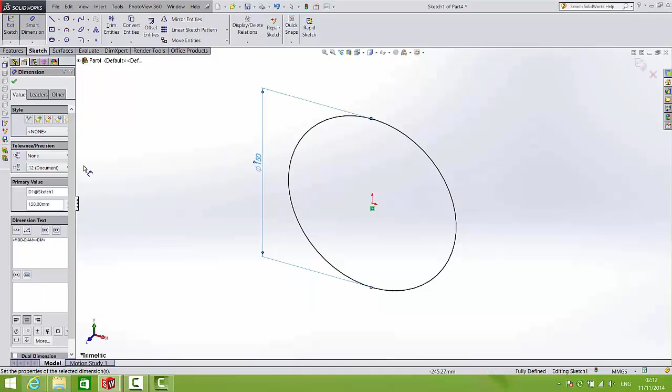So I've opened up a new part and we're going to draw the lid in this part. So to do so, we'll draw a circle. Dimension that circle to be 150 in diameter, and we'll extrude that to a height of 35, but with a taper or a draft of 2 degrees. So this is the blank for our lid.

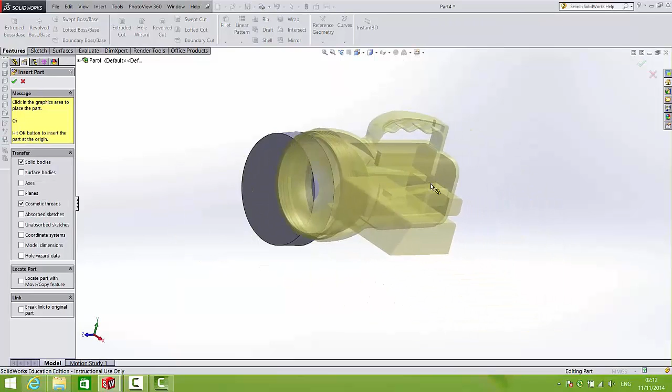We want to use a copy of our existing torch and thread to cut the thread in this lid. So to do that, we'll insert the torch with its thread. So go to Insert, Part, and select the torch that you want to bring in. So if you're very careful, it will snap into position, but you do have to be very lucky for it to snap into position. So I tend to just leave it one side and carefully put it into position.

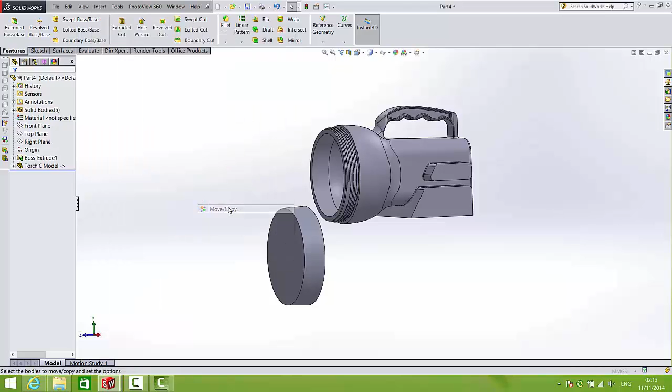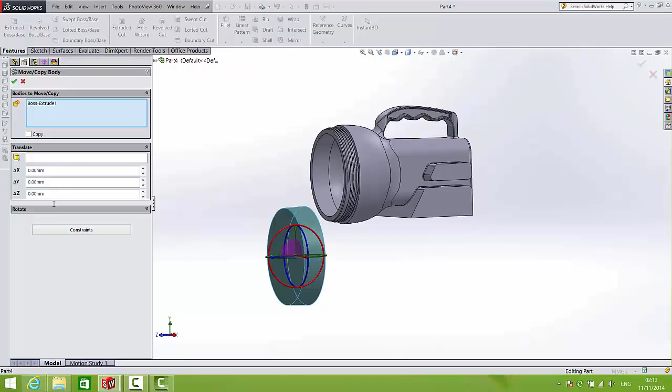You will notice that all the bodies come in, including the 2 bodies that we used a while ago, but that's not going to be a problem. So we essentially have to mate these 2 together, so let's do that. And to do that, we will go Insert, Features, Move Copy. So first of all, the body to move will be the lid, and the mate settings. By clicking this box, it allows us to apply the mate settings. By the way, if you happen to see this menu box, this allows you to move and drag the lid using the XYZ coordinates, but press constraints to go back and apply a traditional mate.

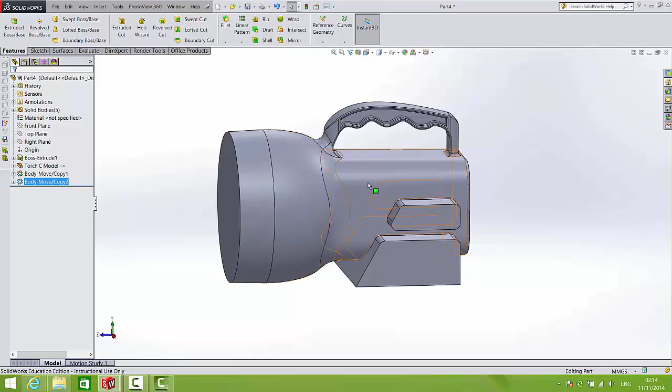So what we can do now is select this face and that face, and they should mate together, which they have done. Now we need to go through the process again. Insert, Features, Move Copy, and now I want to get this body moved, and I will mate the edge of this with the edge of that, and now the torch and the lid have been stuck together. But bear in mind, this is not an assembly, this is the part called the lid, so I want to cut these solids out of it.

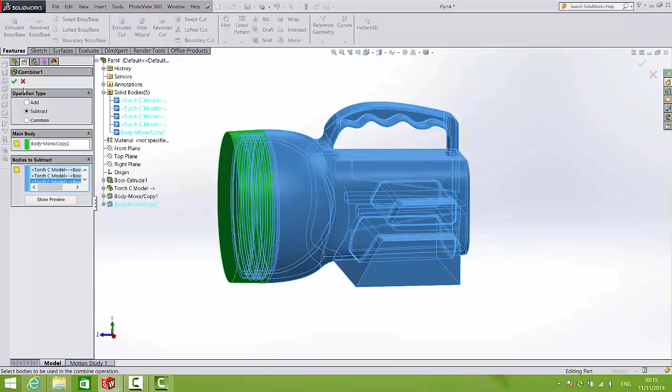So to do so, Insert, Features, Combine. I'll make sure it's on Subtract. The main body is going to be the lid, and the bodies to be subtracted will be the main torch. I can't forget these 2 other bodies as well, and there's the lens inside that I need to remove as well. I can't actually click it here, so from the drop down menu I can select the lens within the body. And now if I approve that, I should have the functioning thread cut from the lid.

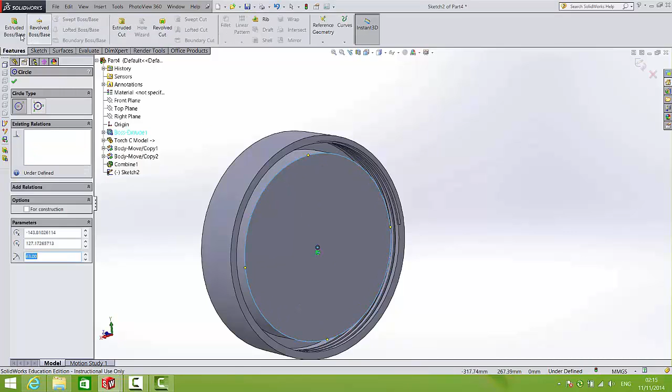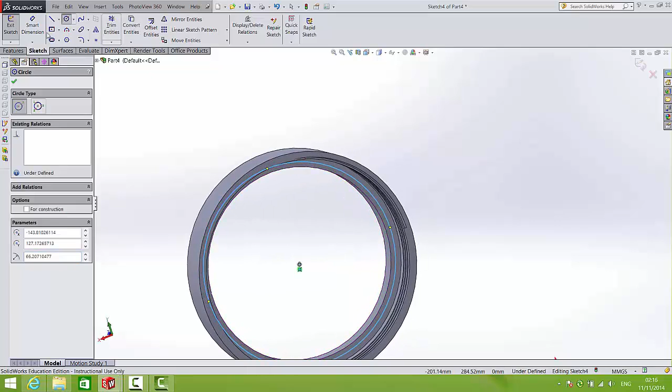So what I'm going to do is create a sketch on this surface of a circle, and I'm going to extrude cut that all the way through. And now while I'm at it, I'm going to make a little recess or a rebate for the piece of glass. So to do that, I will go Sketch, Circle, select this internal plane. That didn't select correctly, so I'll try that again. I'll select the plane first this time, draw a circle on that plane, and let's make it a nice even measurement. Let's make it diameter 130.

In fact, let's make it diameter 140. See how it looks? 140 is a little steep. Let's split the difference. Let's make it diameter 135. And we will extrude cut that to take the piece of glass. And let's say the glass is going to be 3 mil thick. There is a little rebate to take the glass. And while we're at it, let's draw in the piece of glass.

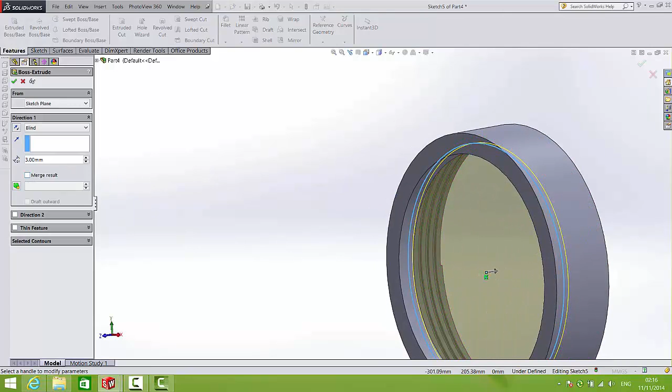So Sketch, Circle, on the same plane. Let's draw the piece of glass there, and this time we will extrude it the same distance, but if we want this to be glass, we will not merge the result, and in a few moments time we can make this body glass. So let's put a chamfer on this line here. So we'll click chamfer and we'll do a distance chamfer, and let's try a 6 and a 3 and see how that works. Not bad at all.

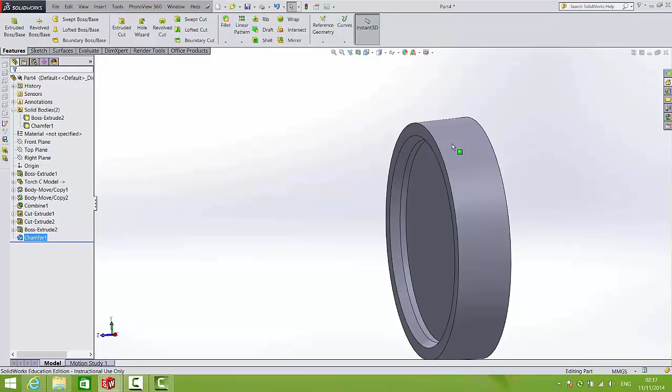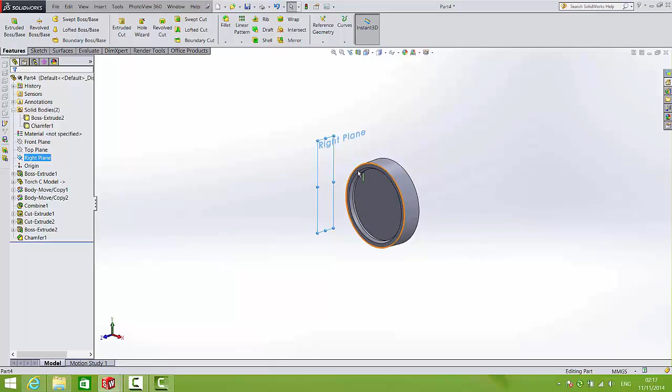And let's just get a little bit of detail up here. So on the front plane, I beg your pardon, it's actually going to be the right plane. Now, no matter, I just notice here that the right plane is shifted. This happens sometimes when you move bodies around, because I moved the lid from the right plane. So I'm going to need a plane through the center of this.

So first of all, I'll insert an axis. And now I'll do reference geometry, plane. I'll use the right plane as one reference and the axis as another reference. And I'll just change the angle to 0. And that should put a plane, and it does, perfectly through the center. I essentially made my right plane again. So on that, I'll create a sketch.

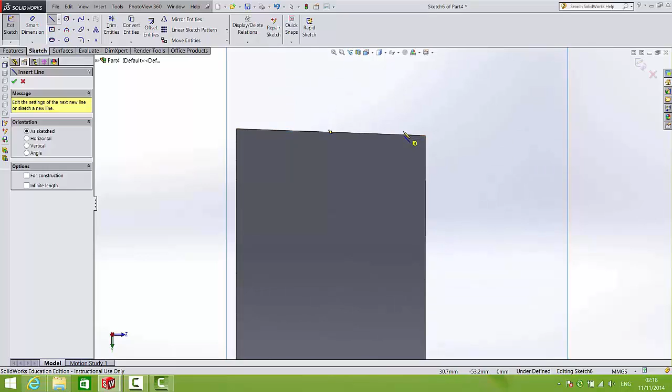It's upside down, but I'll draw it up here. And that sketch is going to look something like this. It's going to maybe start in here, come up at a slight angle, come straight across, and come down. Now, I'm not going to overthink it, and I'm not even going to dimension it in this case.

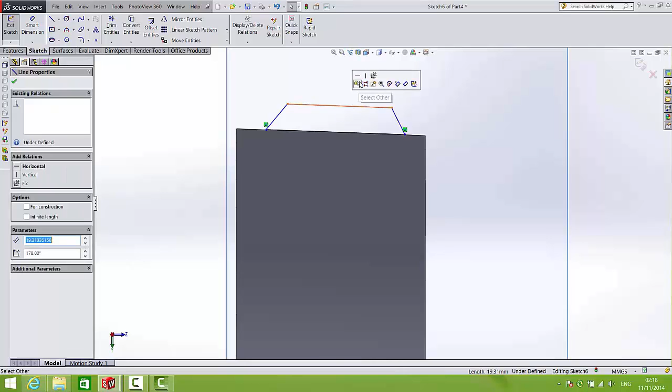I'm just going to make this horizontal. It's already horizontal, so I don't need to do that. In fact, it's not horizontal, it's just inferred a constraint. Those two lines are parallel, so I can delete that and make that horizontal. So there's a little sketch.

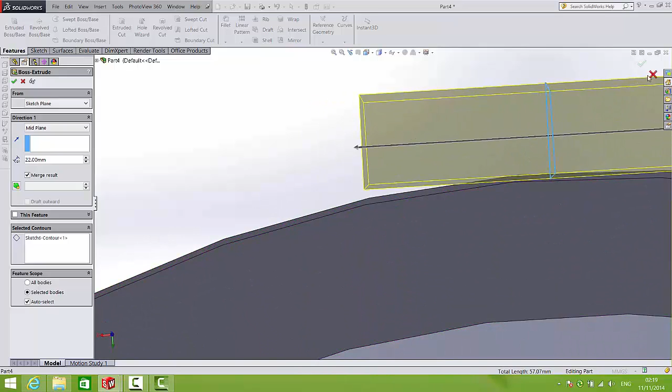I want to make a little grip on the end of the torch. One possible way to do that would be to extrude it, but unfortunately if I extrude it, even mid-plane, you can see it will break contact and leave a little gap there. So rather than extruding it, I'm going to revolve it. I'm not going to revolve it about the bottom, I'm going to revolve it about this axis.

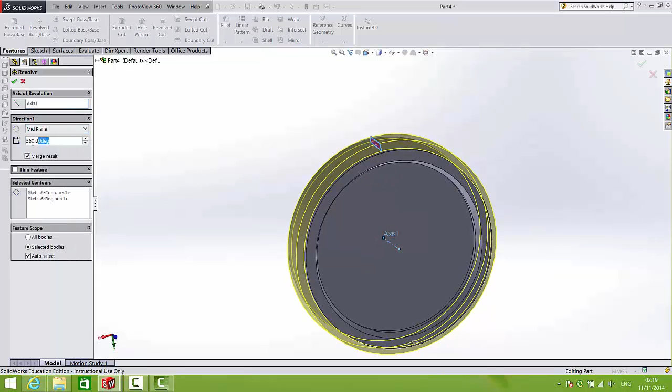Well, first of all, I'll select that profile, and the axis is going to be this axis, and you can see it's doing a full revolution there. I do not want that. I want it to be mid-plane, and let's just say 12 degrees, and that looks okay. So that's a little notch on the top of the torch. Now you could add fillets as you see fit all the way around there, but we'll leave that till later.

So we will now do a circular pattern around this axis, and we'll select this feature, and we'll see how many looks okay. I'm guessing about 8 or 9. In fact, 12 look okay, so let's put in 12 of them. So that is essentially the lid. I mean, there's not much more complexity you can add to it.

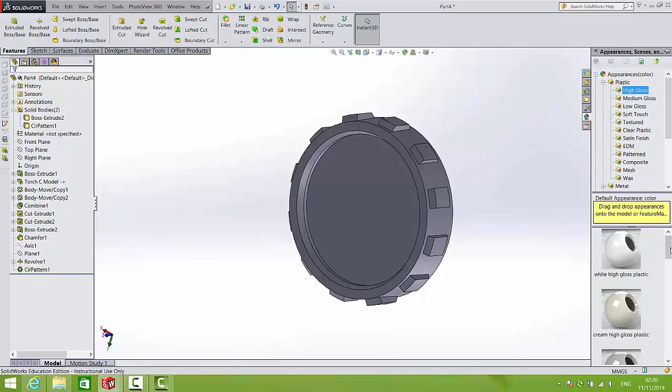While we're here, we'll open up appearances, put on high gloss black plastic and drop it on to that body. We will put on glass or perspex if you want to that body, and there is the lid completed. So we'll save that.

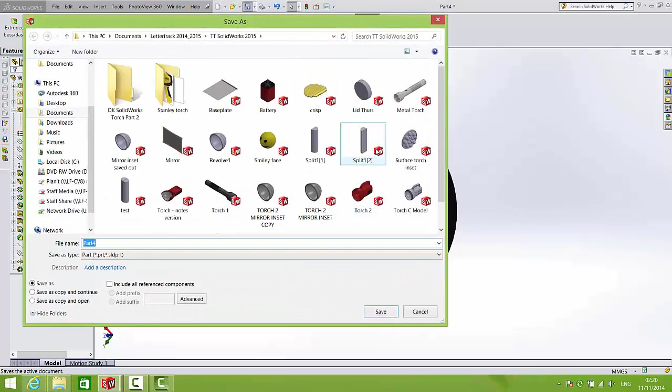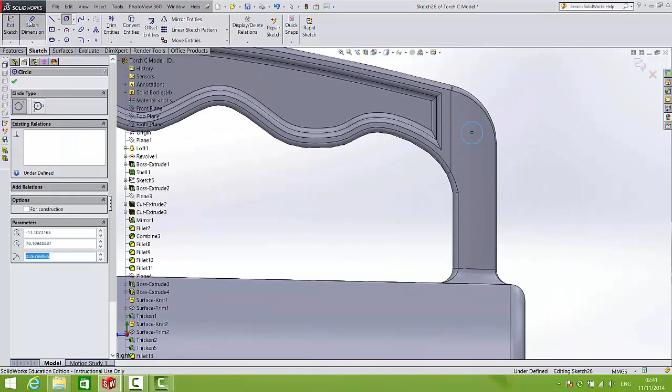So now I'm going to attempt to put an organic looking cord onto the end of the torch. So to begin with, we'll create a little hole on the right plane, and let's say the cord is going to be 4 mm in diameter. So we'll place a 4 mm diameter hole there somewhere convenient, and we'll just apply an extruded cut mid-plane and make sure it just makes its way out.

So our cord is going to fit through that hole, and let's just put a 1 mm fillet on either side. It makes it look just that little bit neater. Okay, so this is obviously going to be a very good start point. So let's put a reference geometry, an axis into that hole, and let's put a plane at a slight angle, let's say 30 degrees. So reference geometry, plane.

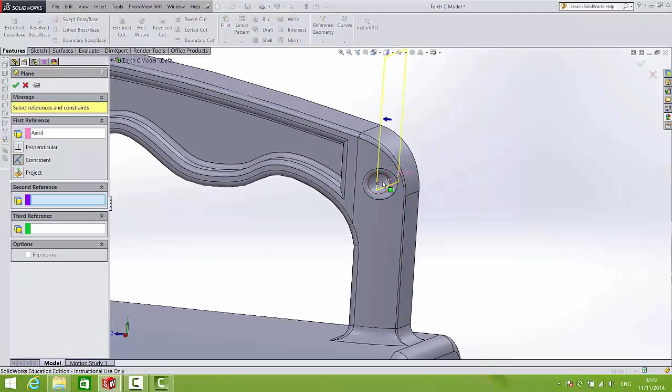I've already selected the axis, and let's select, say, the top plane to be my other reference, and we'll select this angle, and let's try 150 to see how it looks. And it looks pretty good. So 150 puts in a plane at 30 degrees. So the first bit of the cord is going to be draped on this plane.

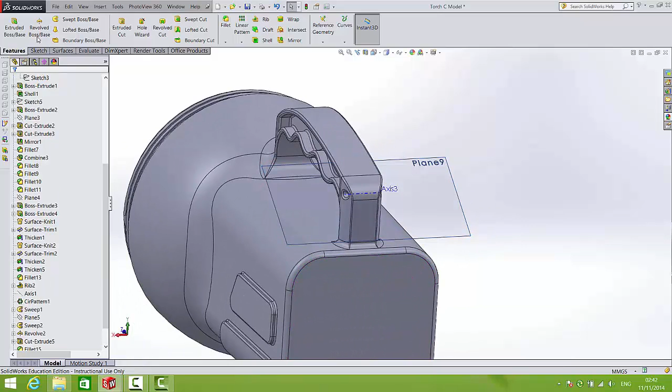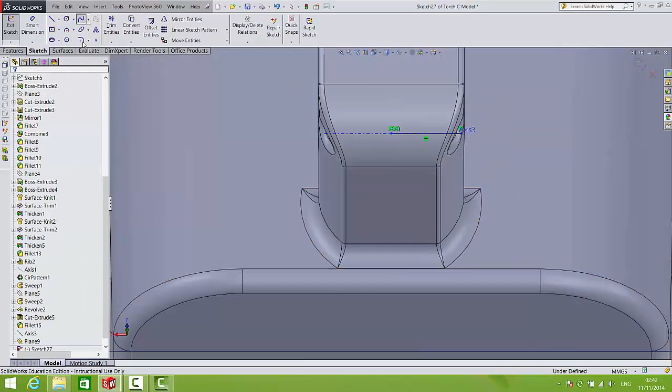So to do that, I'll create a sketch on that plane and I'll look 90 degrees to it. Sometimes that happens, so just look at 90 degrees to it again. And I'm going to do the following. I'm going to draw a line halfway through the hole, just creeping out there. And then I'll switch over to a spline, and I'll try to get the spline coming around in almost like this heart shape.

I'll select that. And I'll put a center line down the middle. Now I'm not wasting time dimensioning this. I should dimension it, but it would really lengthen the videos. So just for instance, to fix the spline, I can just click it and press fix, but I'm not done editing it yet. So I just want to mirror that line and that spline about that line.

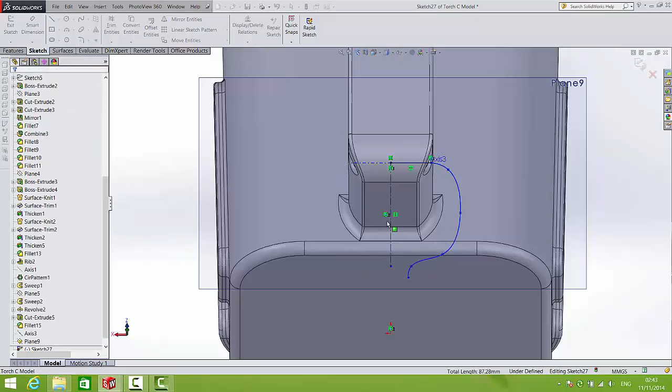And in fact, I'll tweak it before I mirror it. What I want to do is make sure by holding control that this line and this curve are tangent, so that will get a nice smooth transition for my spline. And also down at the very bottom here, I'm going to click the spline, and I should get this little diamond which will allow me to set the angle.

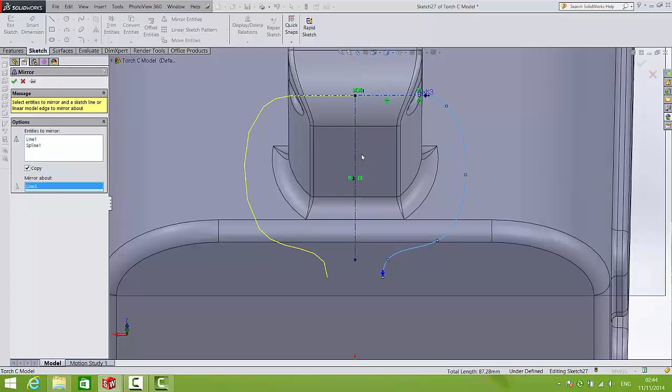In this case, it's going to be 90 or minus 90, to make sure it's vertical. So now I can do my mirror. I can mirror this little bit of a line and that spline about this center line that I added, and press OK on that. So that's going to be the path for the bit of the cord, and you can edit it as you see fit, but I'm hoping that will look okay.

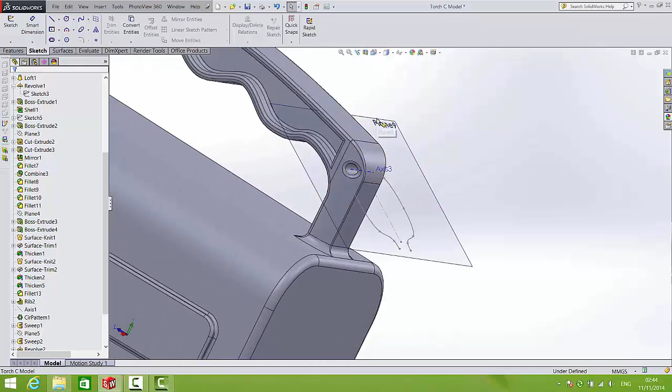So let's approve that. So to draw a circle, I'm going to hide this plane. In fact, I won't for a moment. To draw a circle, I need a plane at 90 degrees to this new plane I've created. So in fact, I'm going to open up that sketch again and just put a center line between there and there, which will give me an axis of revolution for my new plane.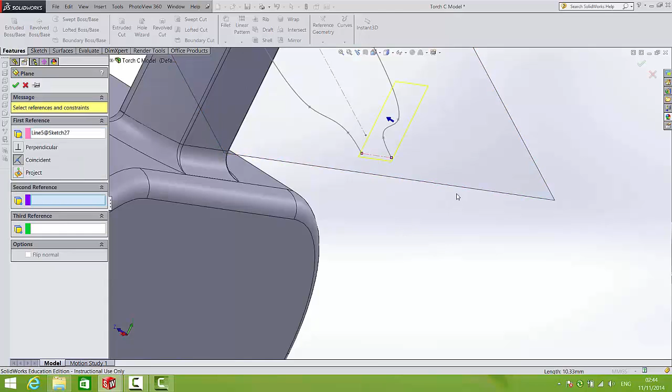So features, reference geometry, plane, select that newly created center line and select this plane, and make sure they go on at 90 degrees. So let's just put on an angle of 90 degrees. Sorry, I messed up there. I'll try that again. Reference geometry, plane, axis, plane, and 90. There we go. So just for clarity, I'm going to hide this other plane, and on this plane, just so we don't make the mistake, I'm going to draw a circle, center it there, and we'll dimension that to be diameter 4.

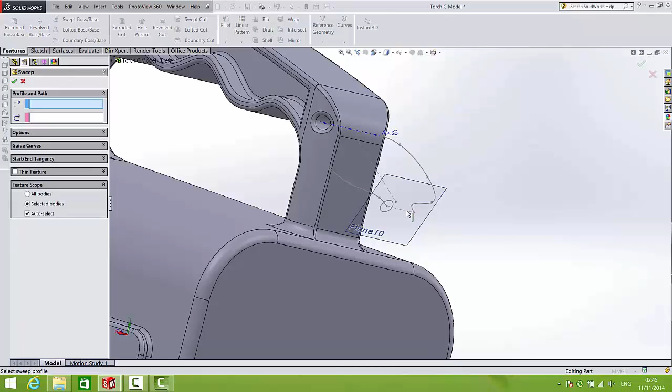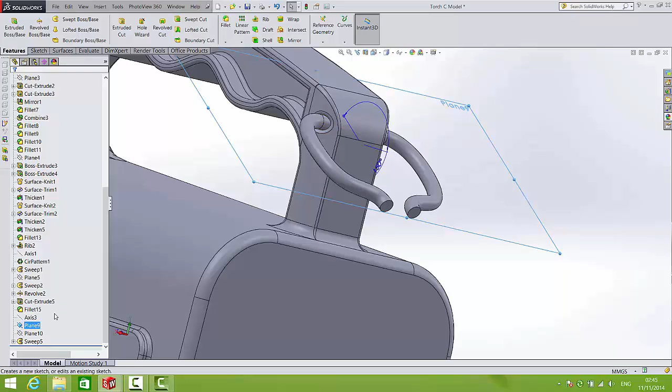So we can sweep that. So let's go features, swept boss base, there's the profile, there's the path, and let's just go into options and don't merge the result. Right, so that's the first bit. Let's just tidy up the sketch a bit. So we'll hide the axis and we'll hide that plane. And now, in fact, I'll bring plane 9 back into visibility. If I can do it there. I can't do it there.

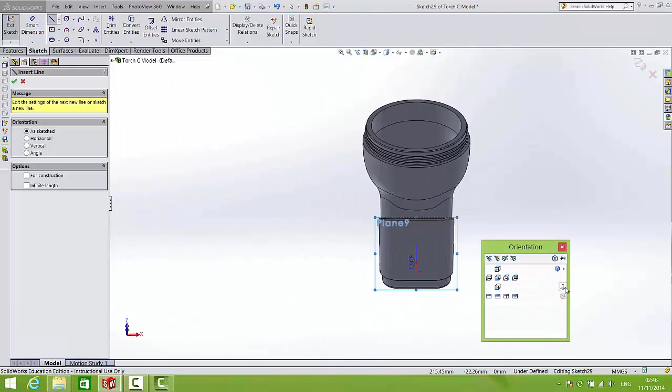There we go. So on this plane, I'm going to continue that little cord. So let's make a little connector here. And what I mean by that is this. On plane 9, I'm going to zoom in. And I'm going to start at the center and go up a little bit, come across, and just make, again, almost like a little heart shape. And I'll join those with a center line just because I want to mirror them. You can mess around with dimensions yourself. Now I'll mirror those few entities about this line.

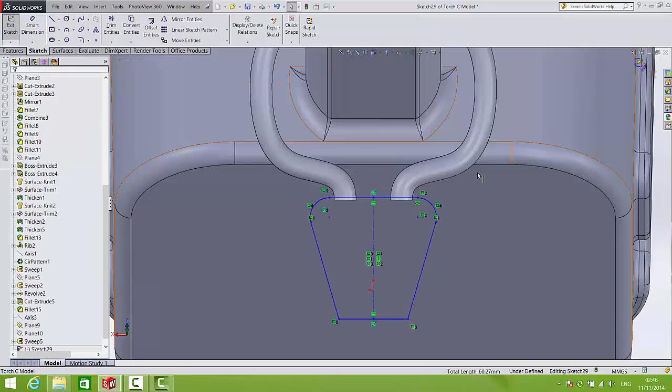Press OK. And I will do a mid-plane extrusion. So features, extruded boss base, mid-plane, and let's bring that to a thickness of 6. So now we almost have a little drawcord there. And I suppose I probably should have not merged that result. So let's not merge that result.

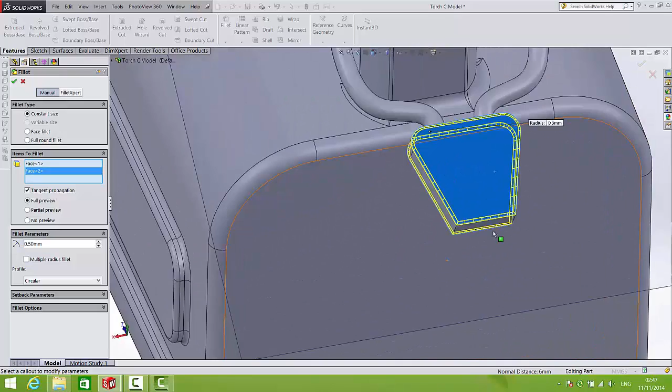And we can just put a tiny fillet on that. Let's see how a 1mm fillet looks. It's a little strong. Let's change it to 0.5. And let's change the back to 0.5 as well. And we'll just take this corner and that corner off it as well. And now we're getting there. So I'm going to hide this plane.

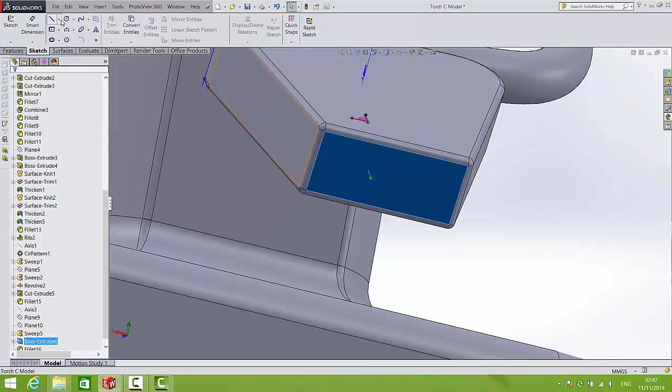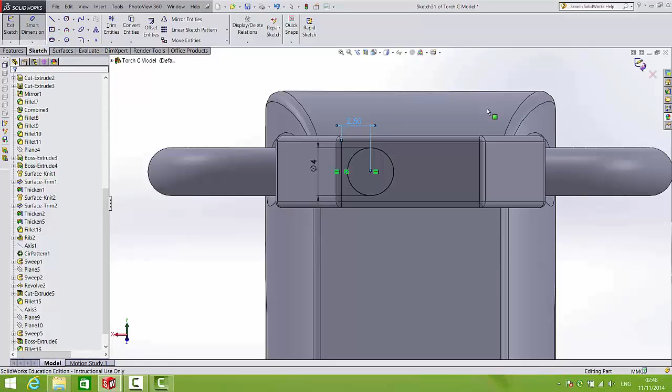But on this tail end, I'm going to put two circles where I want the, in fact, I'll select the plane first. I'm going to put two circles where I want the cords to enter and exit. So I'm just going to have to be careful and put one circle here. We'll dimension it to be 4. And we just have to be careful to tell this point and that point to be horizontal. And let's just smart dimension that from the edge at 2.5.

Now I'm going to close that sketch because I want that sketch to be my profile when I sweep it in a minute. And I'm going to create a second sketch on the same surface, the same size and the same offset. That was 2.5 actually. There we go.

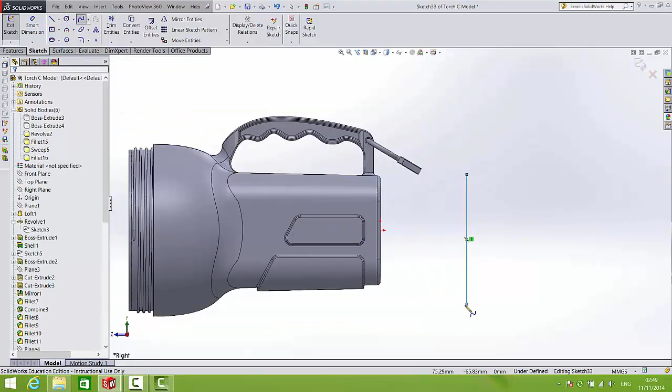So now, to get a 3D spline, what I'm going to do is this. On the right plane, I'm going to create a center line for my axis of revolution. And from that, I'm going to make a spline. Now you can experiment around with this spline and you'll get varied results. But if I revolve that around, there is a separate body, a separate solid along which I can drape my cord.

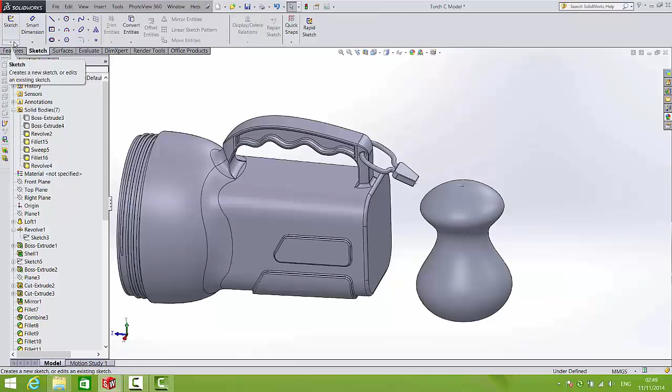So I'm going to go to Sketch, select a 3D sketch this time, and a spline on surface. I'm not going to attempt to start it here. I'm going to just start it up here. And make your way around. It will drape that cord over that surface for you.

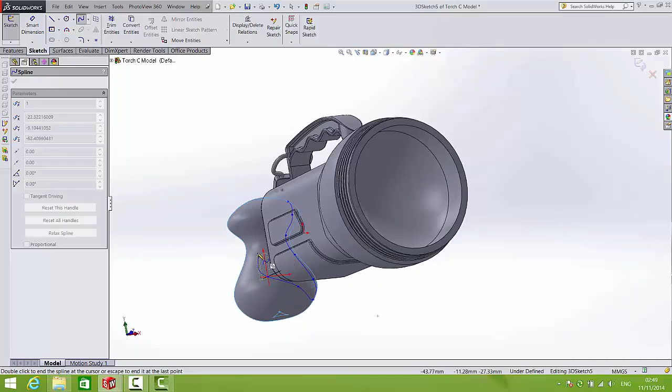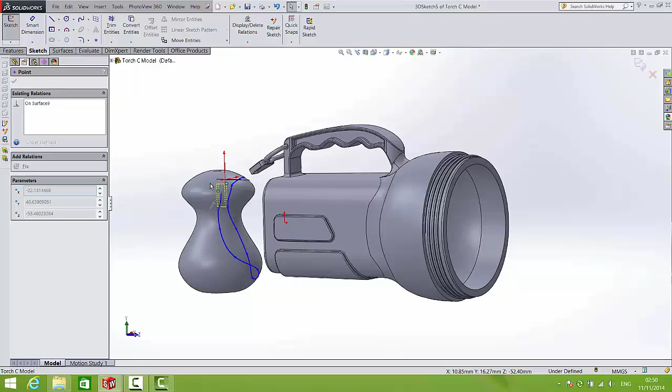We'll select that. Now we can drag the points around to make sure we're happy with them. I'll undo that. I dragged the wrong point around, so we'll drag the point up like that. And it's quite demanding on the computer, so my computer is freezing there. So we'll just try that one more time. Okay, I'll drag that around to the top.

Okay, it's not ideal, so I'm just going to do a bit of massaging on that. In fact, I'm just going to delete that and pop them in again. Be good practice. So spline on surface, and we'll try again. Pick a point there.

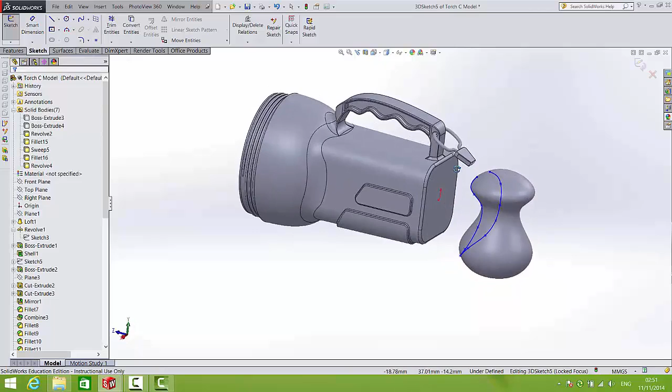And that looks much better this time. Now, to finish off the spline from there to there, I'm not going to use a spline on surface. I'm still in a 3D sketch, so I'm going to call up a regular spline. And from the center of that circle to the spline there will be one spline. And I can click and drag that.

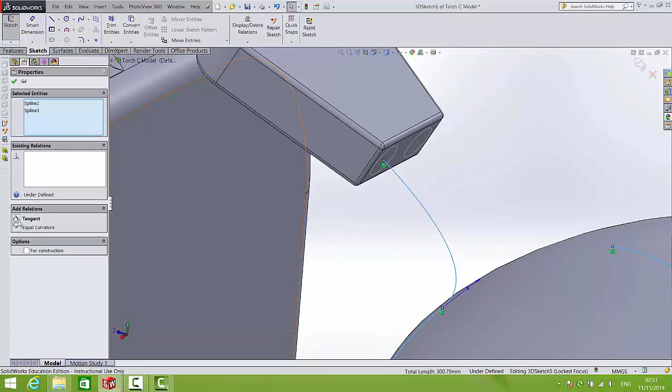And I can set this line and that line to be a tangent. And finally, I can add one more spline from the center of this circle to the end of that spline. And let's just rotate that around a little first and hold Control and select this spline and that spline and tell those to be a tangent.

Now that's why I needed the two circles there. The first circle is going to be my profile, the second circle, or a point indeed, just helped me finish this sweep where I needed it to be. So let's hide that body, and now if we do a features and a swept boss base, we can sweep that circle along that path, and we will not merge the result.

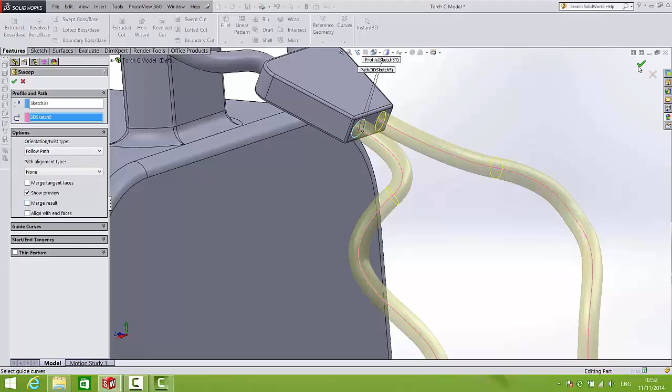And now we have not a bad looking cord at all. And of course, if you go in and edit them and spend a bit more time getting these splines a little bit better, you'll get a much more natural and organic.

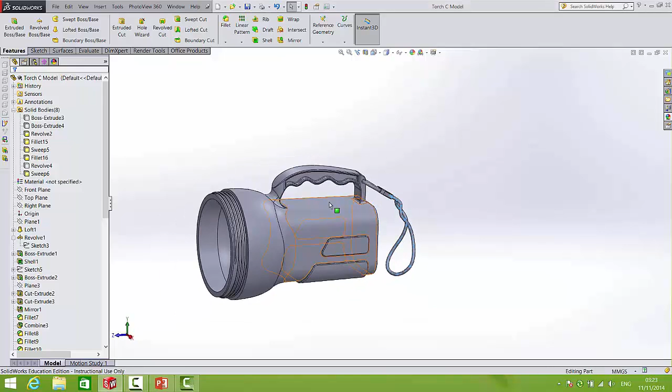So in this final video for now, I am going to do a few bits and pieces. First of all, I'll split the torch, and let's just bring in the battery. Now I have a battery drawn already. It's not too difficult to draw, so I'll just go to Insert, Part, and I'll select Battery. So I'm going to let the battery come in anywhere.

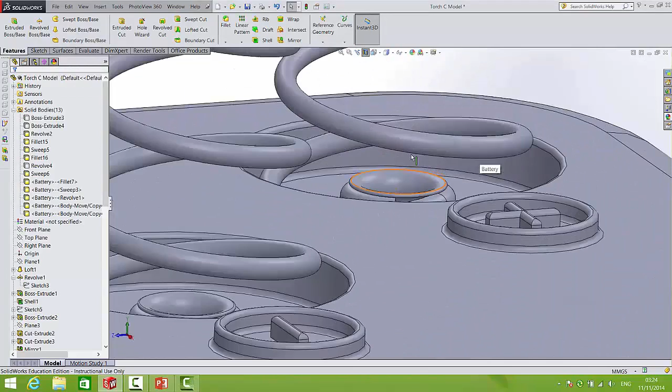The battery is drawn of a few different bodies. I've got the springs, the rivets, and then the battery itself. So it's pretty square, pretty blocky. The hardest part are the spirals, and they're just sweeps. So to put that into position, I want to go Insert, Features, Move Copy. But I want to move all four bodies. So the rivets, the springs, the rivets, and the springs.

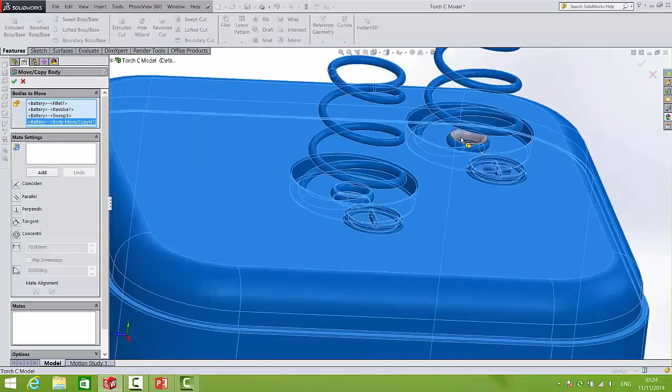And the mate settings will be, I want it to mate with the bottom of the torch, but I want a distance mate of 10 mil to kick in. So the torch goes over there, or the battery goes over there. Now I need to do another one. Insert, Features, Move Copy. Again, I'll select the battery, the spring, the rivet, and the mate will be between this side surface and that plane.

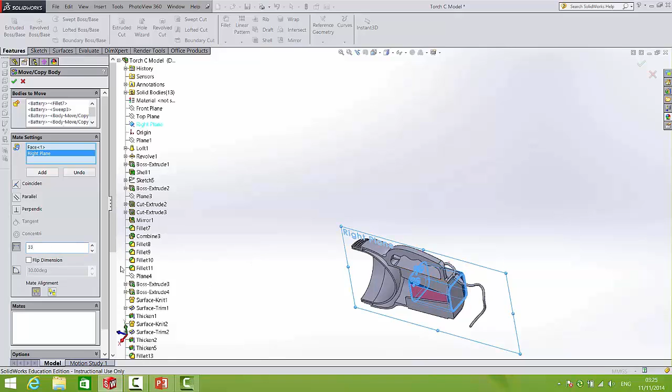Now I know that the battery is 66 wide, so I will put a distance mate of 33, and if needs be I will flip the dimension. Just give it a moment to think about it, and now the battery is perfectly centered in that direction.

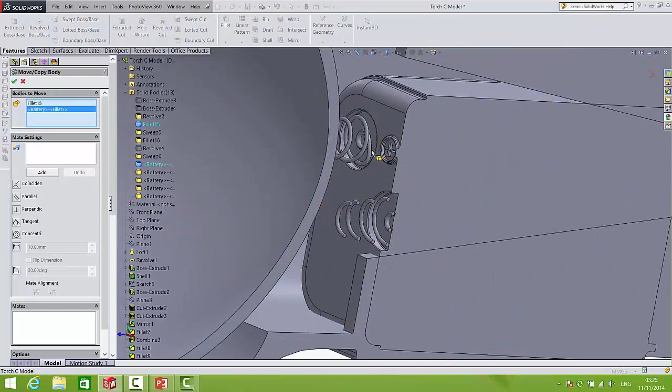And finally, Insert, Features, Move Copy, select the battery, the rivet, and the spring. And we're going to mate, this time, the top surface of the battery and the top plane, and again we'll put a 33 mil offset. Hopefully the battery will be centered in the torch now.

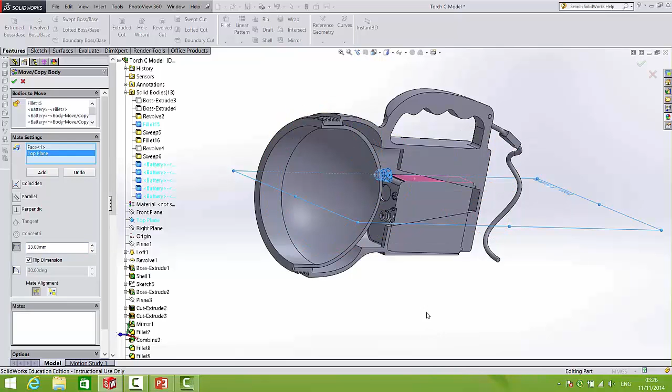Just for some reason it didn't pick up everything here, so I'm going to start that again. Let's see what happened there. We'll go to Insert, Features, Move Copy. I don't think I was careful enough the last time when picking the bodies. No, that should be that. And the mate settings will be the top surface and the top plane, a distance of 33, and flip the dimension.

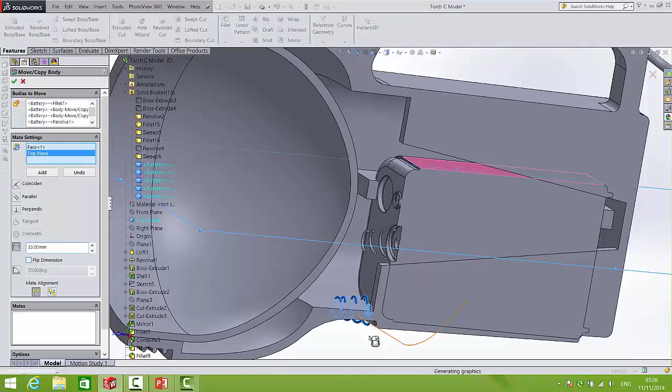And for some reason it just brought the spring, so let's approve it. Okay, it just didn't preview, so it did actually bring the entire battery. So the battery is located in the center, which is very useful if you want to put a bit of circuitry between here and there.

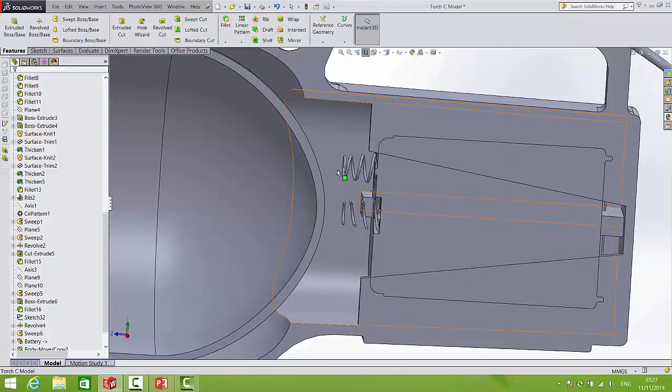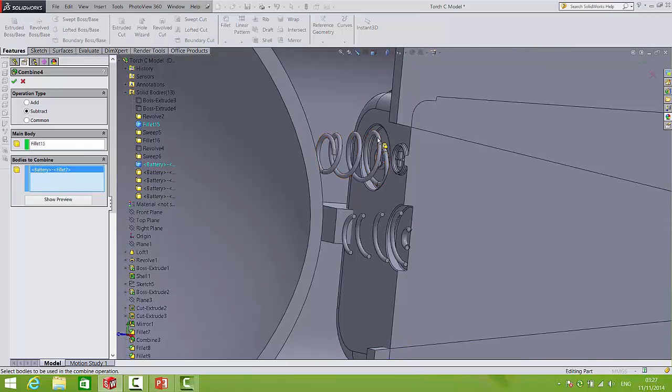Now in order to cut that shape out, I'm going to go Insert, Features, Combine, do a subtract, and the main body will be the torch, and the bodies to combine will be the battery, the springs, and the two little rivets. They all need to go.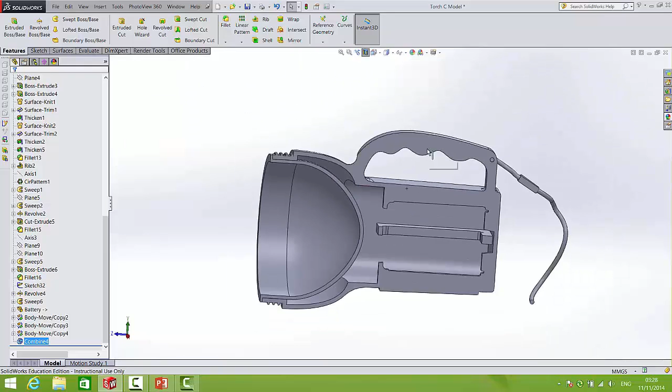And if we press OK on that, take a moment, the exact shape of the battery is cut out. Now we may need to trim up this little piece later to make sure the battery can actually slot in, but I'm going to move on for now.

So before I add a decal, let's just quickly add some color. So I'm going to put high gloss red plastic onto the body. I'm going to put, let's say, a low gloss dark grey or a black plastic onto this thicken. I also need to put that onto the fillet feature. I need to put it onto this thicken.

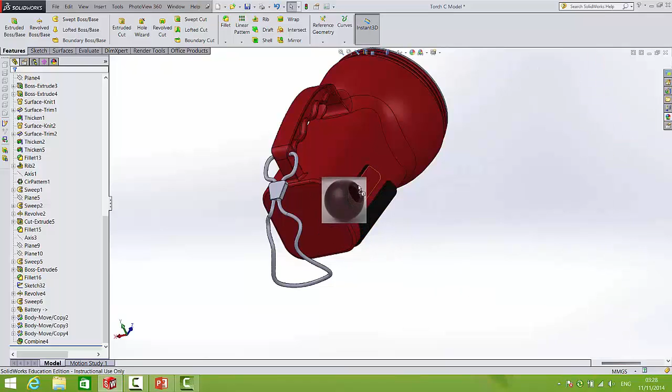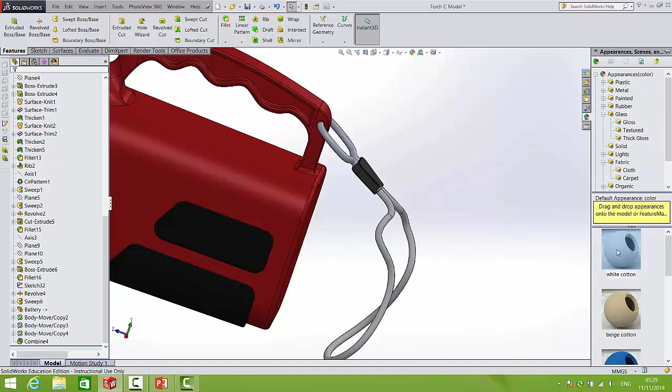A slight mistake there, I put grey on as opposed to black, so I'll pop that back over it. I also need to put black on there, and I'll put black onto this little body there and onto its fillets. And just for the cord, I'll go down and find fabric. You can experiment yourself, but there's a cloth fabric that looks okay in the render, and we'll put the cloth fabric on there.

And finally, just for the lens, we can put on gloss, and we can put on mirror. See how you get on with mirror. If mirror doesn't look well, polished titanium usually looks pretty good. So finally, to put on a decal, we can first of all just go to PowerPoint, which is a very good place to edit decals.

Both these decals look good. This GMIT decal, if I right click and format the background of the PowerPoint slide, I can see that it actually has a white background. So to clip out the white background, double click it, go to color, set transparent color, and then click any of the white area. So to save this, right click, save as picture, and just call it logo. And I'll save it to my desktop and to this file so I can get it.

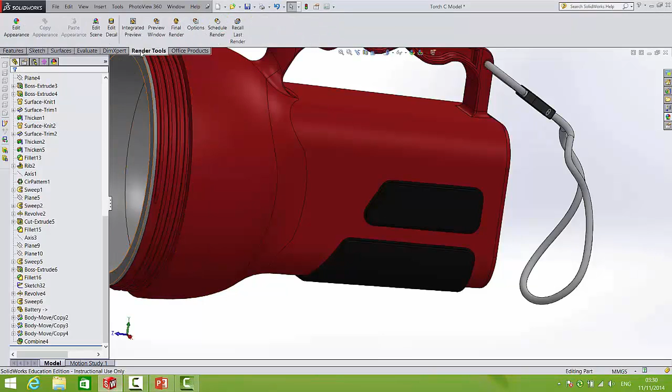So it's called logo. Now interestingly enough, this is just a text box within one of the Office programs. You can right click and save as picture, and I'm going to call this text box image. I'll save that to the same location. And that allows me to write and change any font and make that into a decal. So the use of that is as follows: render tools, edit decal, browse, and I'll go to where I saved it. So it's in here.

So the My Torch decal will allow me, if I click this surface, to simulate. Now, by the way, the logo will come in with this black background, unless you select Use Decal Image Alpha Channel. And now you can see that's a good way to simulate putting your own handwriting or putting text onto a torch. So I leave that there.

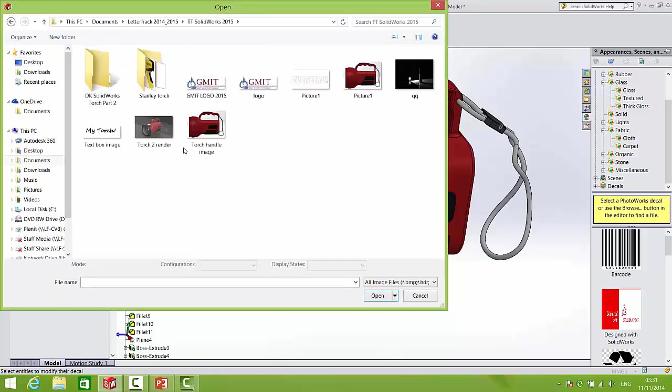And if I want to put the logo on here, edit decal, browse, go to that folder and hit logo. And then click the surface you want to put the logo onto. Now this logo comes in with a white background, which leads me to believe I selected the incorrect one. So I'll go edit decal, browse, go back to my folder, and yes, I mustn't have saved it correctly. So I'll just quickly go back in there and save that correctly.

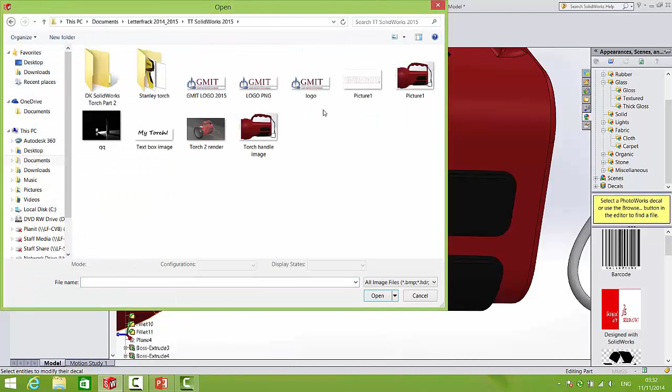Right click, save as picture, and of course I need to change this to a PNG file rather than a JPEG. So I'll call this logo PNG, and now we'll try again. So browse and find my file, and logo PNG, click the surface. Now it comes in with a black background, so we'll hit Use Decal Image again, and we can now rotate that, and we can move it a little. Let's rotate it, make it a bit bigger, and now that will come out quite nice in the rendering.

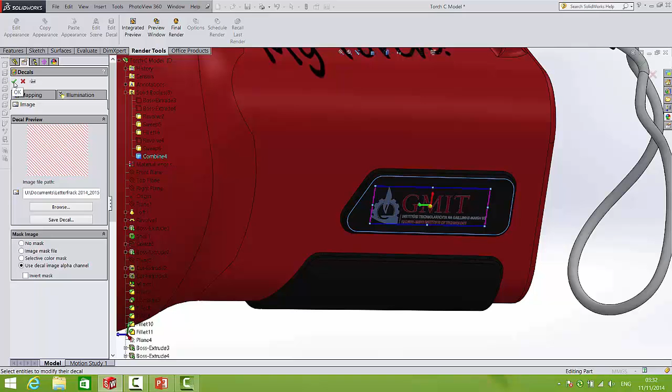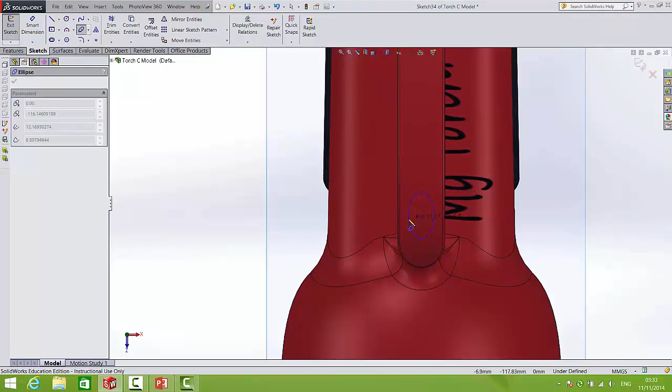So the last thing I'm going to do on this torch is just put in a little button. So I should really have done this earlier, but it escaped me. So let's just put that plane up there, and we'll create a sketch on that plane, and the sketch is going to be an ellipse, and we will extrude cut that down.

Rather than cutting it down all the way, let's offset it from surface just by 1.5 mils, and we'll select this surface, and I just need to flip the side to cut because it's cutting above the surface, so reverse offset. Now it will cut down into the surface, and there you have the little notch.

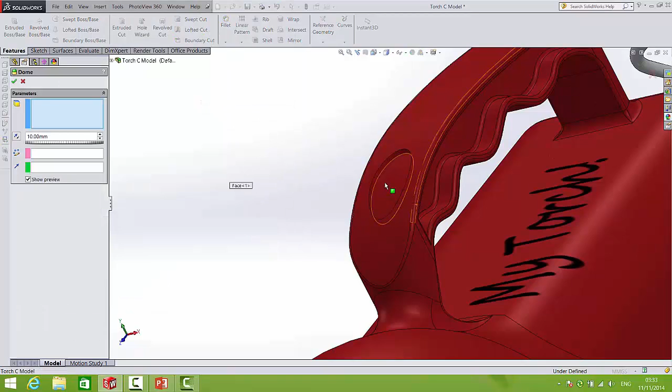So to add the button, one good way to do that is to go to Insert, Features, Dome, select the surface. Takes a little bit of time for this to work. I don't think the 10mm dome will work, so let's go to 2mm dome, and now we have a little button. Let's go to 3mm dome. Yeah, it looks good. And finally, let's just put a bit of matte black rubber onto that feature.

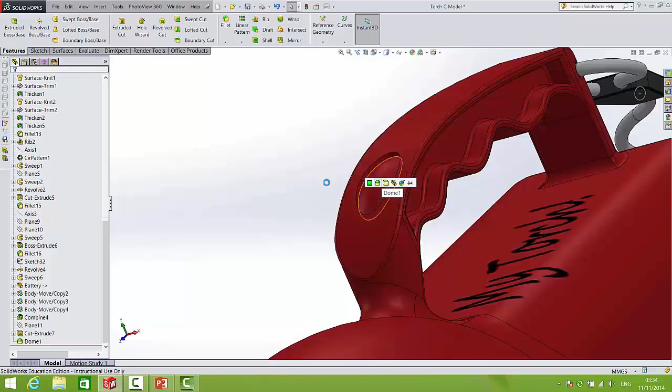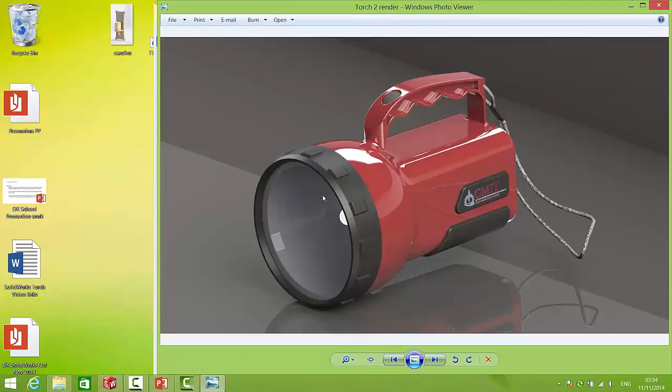So there we have it. So you bring that into the assembly, stick on the lid and render it, and you've got a very nice torch with a lot of features to play with. Okay, so when you do render it, it will look like this. So there's absolutely nothing different in this torch. That's exactly what we've done when we've